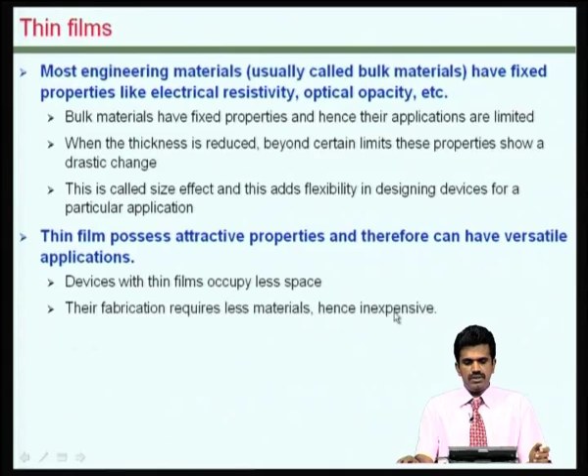Obviously, since these are thin films, the volume occupied by these, and hence the devices made of these, is much smaller. So they occupy less space, and the overall requirements in various contexts in terms of materials, in terms of energy required, etc., would be far less when materials are handled as thin films.

Going back to what was discussed in the previous lecture, various types of thin films are used in the fabrication of MEMS and microsystems. These include semiconductors, various metals, several special materials, and also several dielectric materials, including derivatives of silicon. We also see here polysilicon, and I will discuss what this is a little later in this lecture.

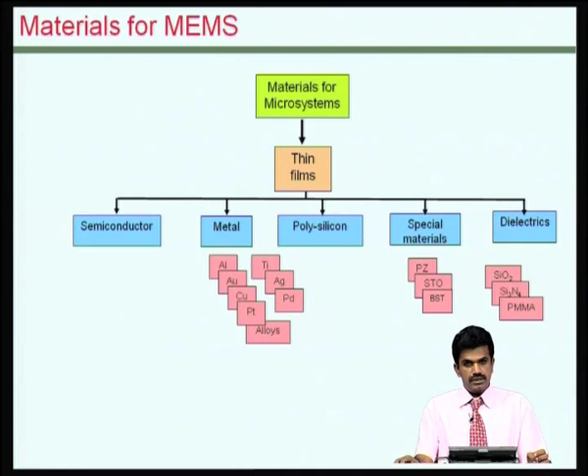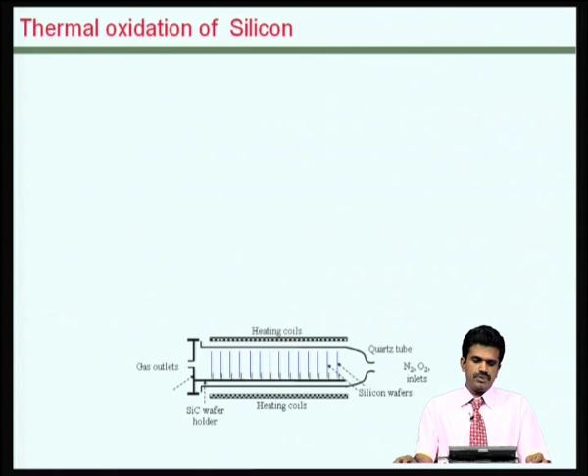One of the easiest films that can be made on a silicon wafer is the oxide of silicon, and it can be fabricated in a simple furnace like this by processes known as oxidation, and whether there is steam present or not, we call it wet or dry oxidation method. The chamber that you see here is a dry oxidation furnace,

in which you have these gas outlets, and there is a series of wafers assembled, and all these could be oxidized simultaneously using these heating coils outside the quartz tube where these are arranged, and you have this gas flow here.

The wet oxidation process is relatively faster, but the films grown by this are typically less dense and porous, and hence where the requirement is for porous films, one usually goes for wet oxidation and vice versa.

Dry oxidation is a little slower, and typically denser films can be formed.

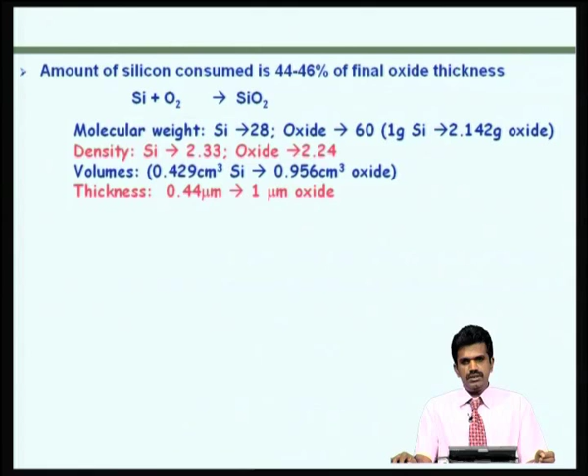We basically start with the molecular weights of these materials, the ingredients, and so essentially we can say that 28 grams of silicon would result in 60 grams of oxide, and knowing that the densities of silicon and oxide are 2.33 and about 2.24 - again this could vary, the oxide density could vary based on the approach by which it is fabricated - based on these we could calculate the volume of silicon consumed relative to the volume of the oxide that is formed. Working through this, we can see that about 0.44 micrometer thickness of silicon would result in a micron thick layer of oxide. So this is one good way of calculating the oxidation procedure, the thicknesses of the material that is formed.

In fact, the rate of oxidation by either of these processes depends on various factors. It depends on the crystal structure of the silicon, that is whether it is a 100 wafer or a 111 wafer. In a previous lecture, we have seen that the chemical characteristics of the silicon wafer depend on the crystallinity, and silicon is primarily an anisotropic material. The oxidation rate also depends on the doping and presence of various impurities in the oxidizing gas, and also the other parameters that one can use in the process.

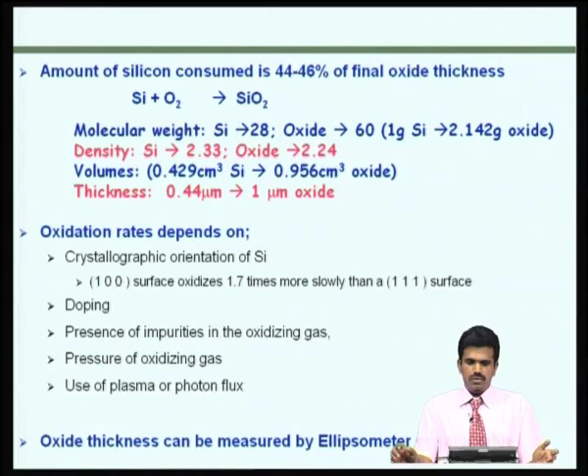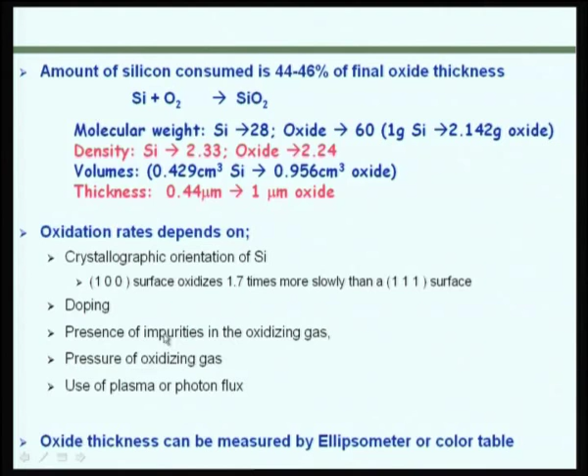Typically, the oxide thickness is measured by an instrument called an ellipsometer, and we work with a standard table of colors based on how the wafer would look. You make use of that and then determine the thickness.

But oxidation is only possible in the case of silicon, and only to form silicon dioxide.

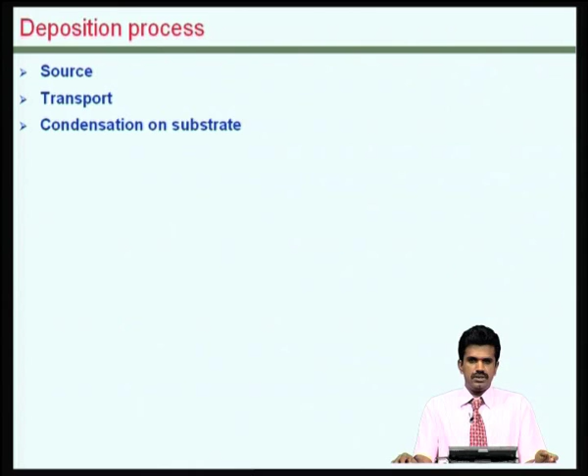In general, to work with thin films, we need to start with the source material of the thin film, transport this source material, and condense it onto the substrate. So a series of process steps would be required in a general scenario when one would want to deposit a thin film onto a wafer, whether it is silicon or other materials. And obviously, the nature of the film deposited would depend on various process parameters, including what the substrate is, the temperature, pressure, whatever gases that you are using, and various other factors similar to that.

So in the deposition process, what we are trying to do is create the most favorable process conditions, so that material is transferred from the source to the substrate surface in the most efficient manner, and so that we get the best quality films, possibly with the maximum thickness possible within the minimum time, so that we get some kind of engineering improvement. There are basically two approaches.

One is called physical vapor deposition, which is essentially the physical transfer of material from the source, normally known as the target, to the substrate. Whereas in the case of the chemical process, it's essentially based on some kind of a chemical reaction to deposit the material onto the destination, which is essentially the substrate.

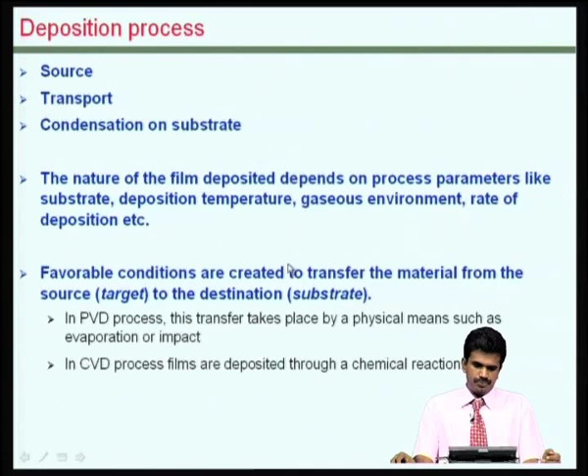Major deposition schemes therefore are based on either physical vapor deposition or chemical vapor deposition. Some examples of physical vapor deposition include the evaporation technique and what is called the sputtering technique. There are several variants of these, as you will see in subsequent discussion. There is also, as I mentioned, chemical vapor deposition technique, which is typically used for better quality films.

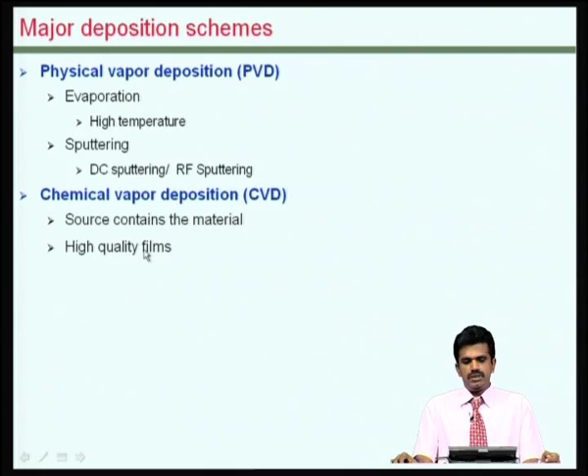And there are some other methods which are used for specialized purposes. For example, electroplating is used when one needs really thick films of materials relatively speaking, and spin casting or spin coating methods are used for polymeric materials, including photoresist, which are required for patterning. And there is also epitaxial growth of semiconductors like silicon over a surface, and things like that.

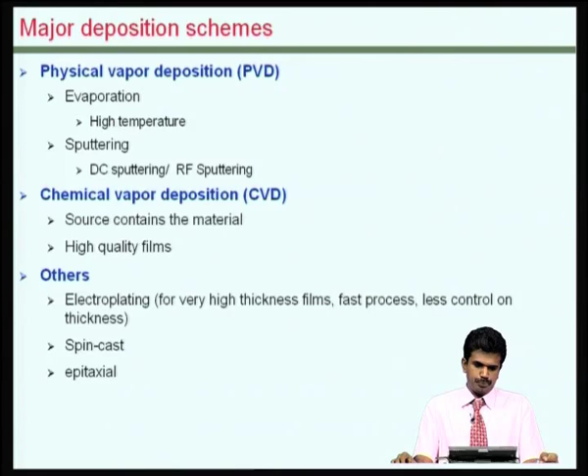Let us look at one of the common examples of evaporation that you would have seen in your own house. One of the common examples is basically you would have seen water boiling in a vessel in the kitchen, and if you put a cold lid over the boiling water, you can see that the water condenses on that lid surface.

Evaporation is essentially the same thing done for engineering materials such as metals, which could be melted at relatively low temperatures. Hence, evaporation technique is usually used for metallic materials, but obviously metals cannot be melted at let us say 100 degrees centigrade or anything near that.

So one needs to essentially reduce the pressure within the chamber, so that the melting temperature required for the metal is relatively, once again, under control, so that it is not too high, and we need to have some kind of an arrangement to create that kind of a temperature.

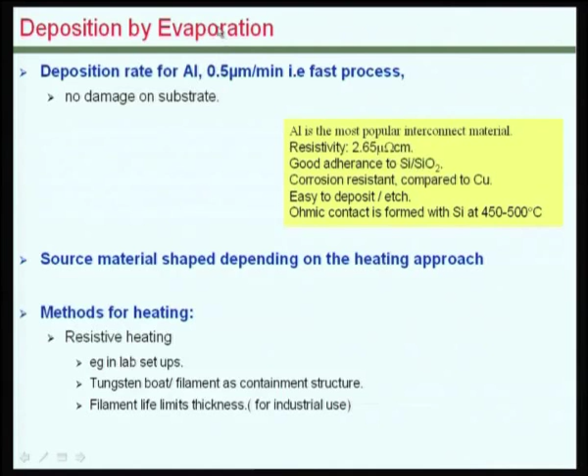Essentially the evaporation rate will therefore be a function of the vapor pressure of the metal that is being deposited. One of the common examples is aluminum, which has a relatively high rate of deposition when deposited by evaporation. A relatively good quality of film can be obtained at a good thickness by the evaporation process, and it sticks very well with the silicon substrate. Hence you will see that aluminum is used in ICs quite often, and one of the reasons is that it can be deposited relatively easily.

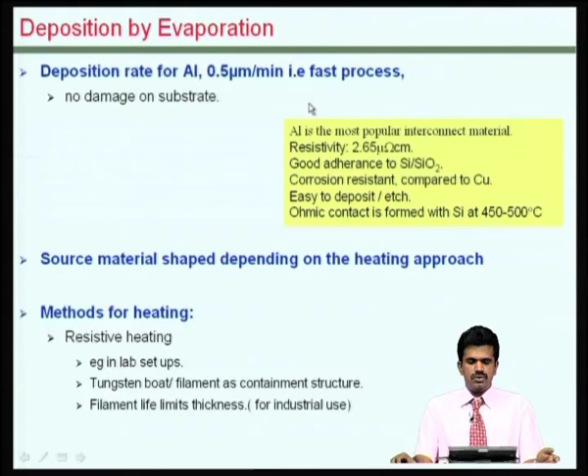The source material will be shaped, whether in terms of filaments, springs, or small pellets. It all depends on the heating arrangement. One of the simplest ways of heating, especially for aluminum, is resistive heating, typically used in a lab setup where a tungsten boat is heated, and pieces of aluminum are kept over it, which melt and evaporate, getting transferred onto the substrate surface.

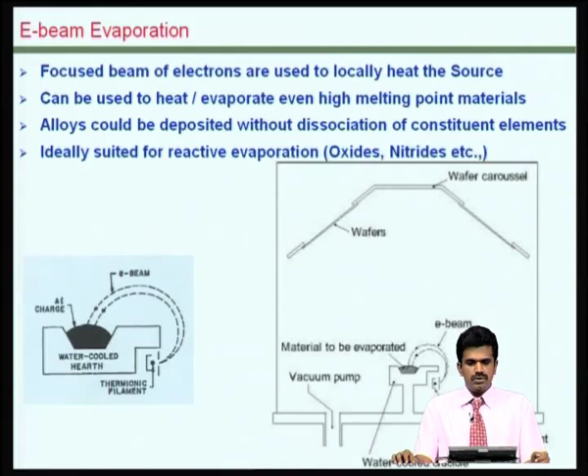But most materials have much higher melting temperatures and cannot always be melted just by heating them. So we use other ways of energizing their atoms or molecules from the source so they can be displaced and transported onto the substrate surface. Here is an arrangement in which an electron beam is used for evaporating the source materials inside a crucible, and these could be directed towards the wafer in a carousel.

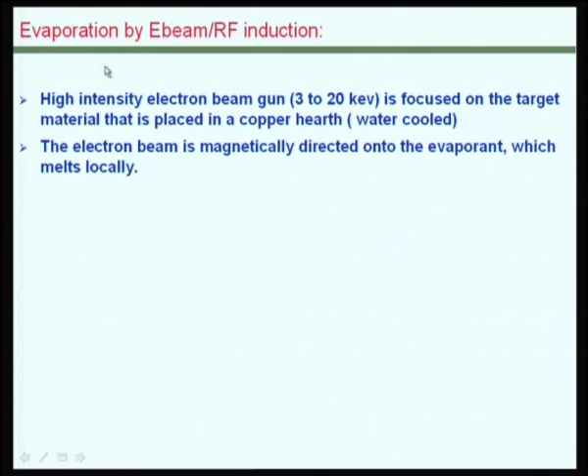It is also possible by RF induction to generate such beams, which could essentially displace atoms from the source material inside the crucible. These approaches result in relatively better quality films compared to simple heating based approaches, and have reasonably good deposition rates. But because these include energy transfer from one beam to another, there could potentially be damages happening in the devices on the substrate, so one has to choose the approaches required in a particular context. Obviously, the system required for such deposition could be more expensive than the previous one.

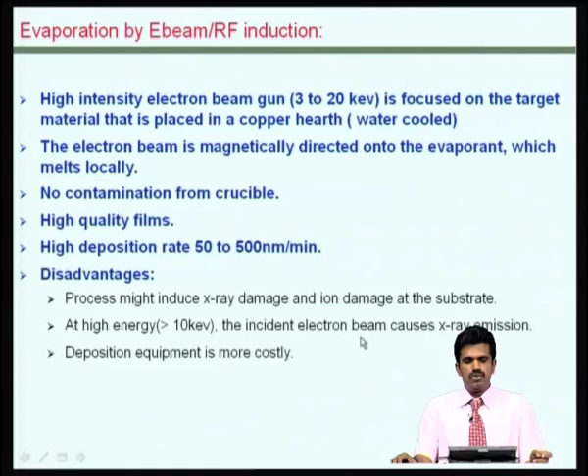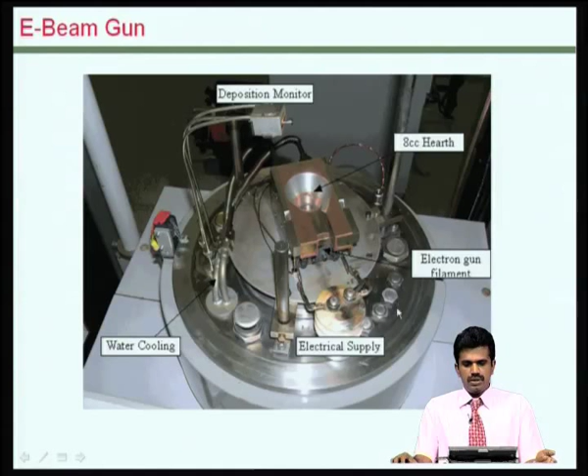Here is an image of an opened out chamber in which this electron beam gun can be seen very clearly.

In the second physical method listed, there is sputtering. This is once again a physical phenomenon of transporting material, done by creating a plasma, and the positive ions created by this plasma are attracted towards the cathode. The source material is kept at the cathode, and when these ions bombard the target, atoms are sputtered out. We keep the wafer at the anode, so that the displaced, sputtered atoms coming from the target material attach onto the wafer. So the film essentially grows on the wafer.

Once again, to create this plasma, one requires a low pressure, and hence this is done in a vacuum enclosure. So the source material is at the target, and the substrate for sputter deposition is kept at the anode.

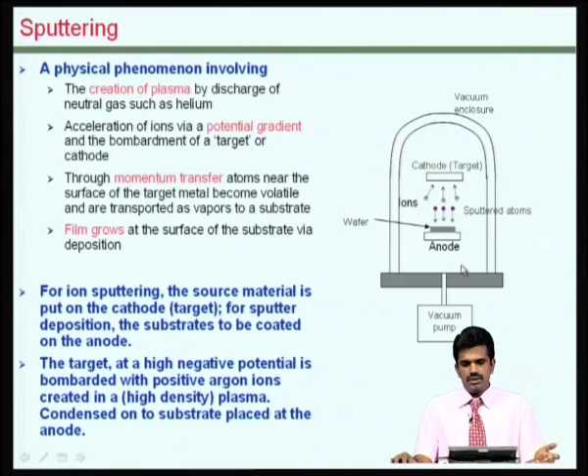The target, as I mentioned, is at a high negative potential, and the ions in the plasma - argon is typically used as it is an inert gas - are used for the displacement, and the displaced atoms are condensed onto the wafer.

There is a terminology called sputtering yield, which is essentially the average number of atoms ejected from the target, kept at the cathode. This depends on the incidence angle of the ions, the energy of the ion, the mass of the ion and the target atom, and the surface binding energy of atoms in the target.

Hence it would vary depending on the target material. As you can see from the list, with a standard plasma creation environment, the average number of atoms displaced would vary, for example, from 0.51 in the case of titanium to 2.4 in the case of gold in this list.

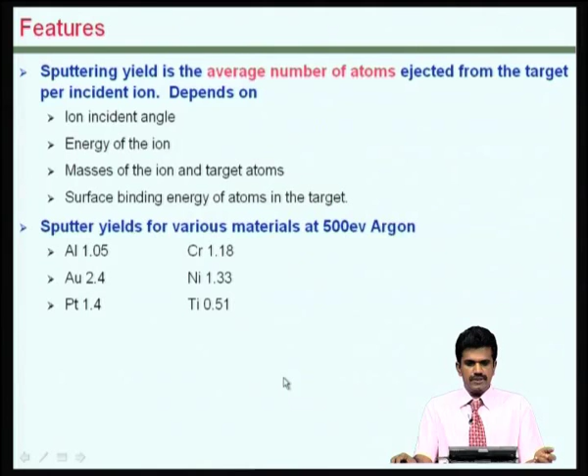The basic features of sputtering include a wide choice of materials, because in the case of evaporation, we could only use materials with relatively low melting points. Since sputtering is usually done at a lower rate, films have better adhesion characteristics, and there are ways to engineer sputtering to achieve complex stoichiometric films.

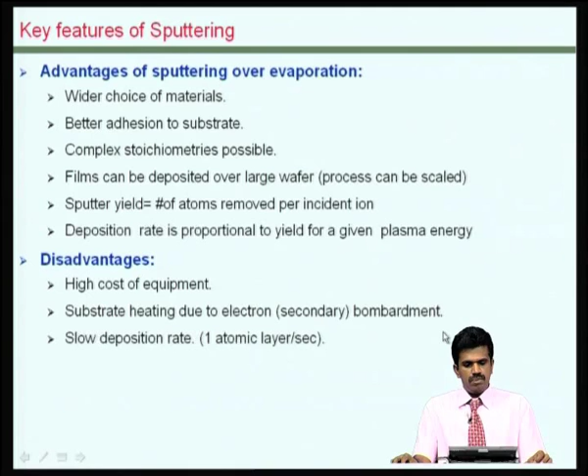Films can be deposited over a larger area by sputtering, and hence compared to evaporation, sputtering is more popular and widely used when one wants to cover larger wafers, especially in industrial facilities. The deposition yield is proportional to various factors we have seen previously. Disadvantages include the high cost of equipment, and sometimes substrate heating happens due to secondary bombardment. Also, as mentioned, the deposition rate is relatively slow.

There are essentially two types of sputtering depending on how one creates the plasma. One can create a plasma with DC for conducting materials such as metals. We create an RF magnetron based plasma for dielectrics or insulating materials, which has better control, especially for depositing these dielectric materials.

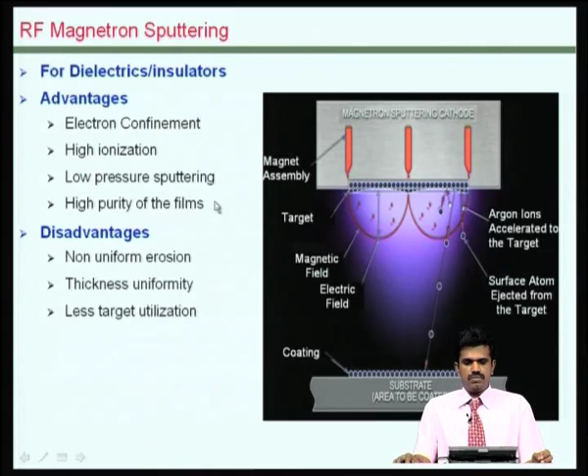And once again, this is also very popular for large area films, especially for industrial applications. There are challenges in creating uniform films, and in proper utilization of the source, which is essentially the target material for the films.

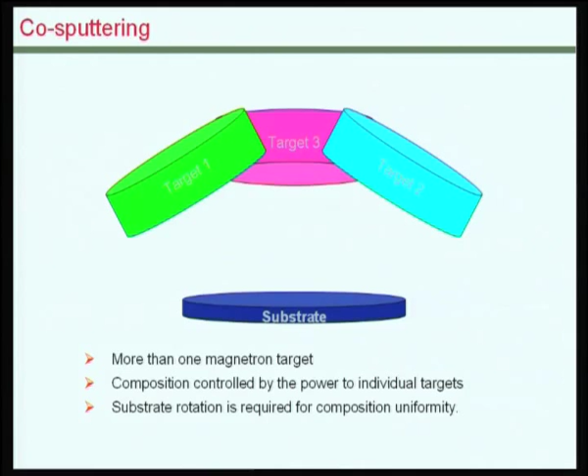In this approach, it is also possible to do co-sputtering with multiple targets. So when we need a composite film, it is also possible to locate these targets appropriately, so that we can have a co-sputtered film based on the various materials provided with individual targets. That is one key advantage of using sputtering.

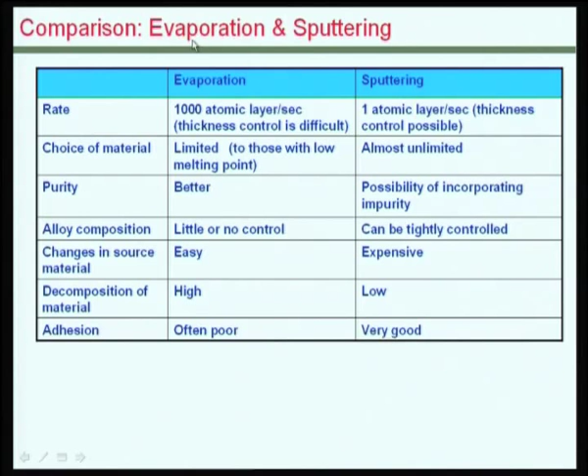If you look at a basic comparison between evaporation and sputtering techniques, what stands out includes the low rate of deposition of sputtering and the unlimited choice of materials available in sputtering. Relatively, evaporation gives better purity films and can be used for alloy kind of materials, but obviously it is more expensive and results in films that are typically of better quality than evaporation.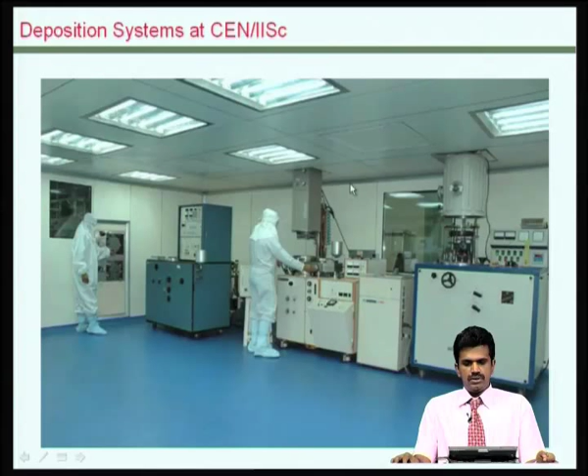What you see here is a set of deposition equipment available at IISc, where you can use sputtering or evaporation kind of techniques for depositing various films.

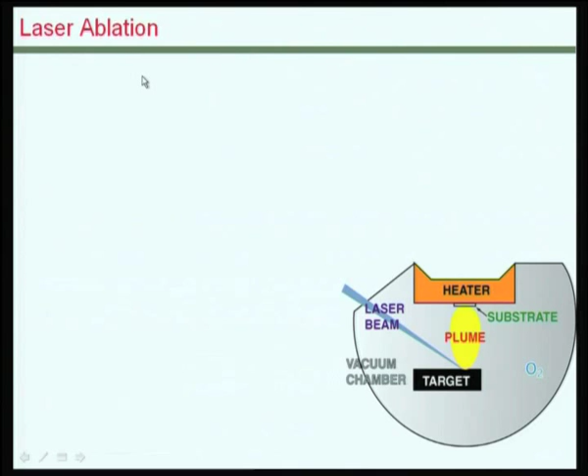Another approach for depositing even better quality films is based on laser. In this case, as in sputtering, instead of using an ion beam, we use a laser beam. Lasers can be used to melt materials because of their high energy, and this melted material can be arranged to be transported onto the substrate. One of the methods is essentially based on pulsed lasers, typically called pulse laser deposition or pulse laser ablation techniques.

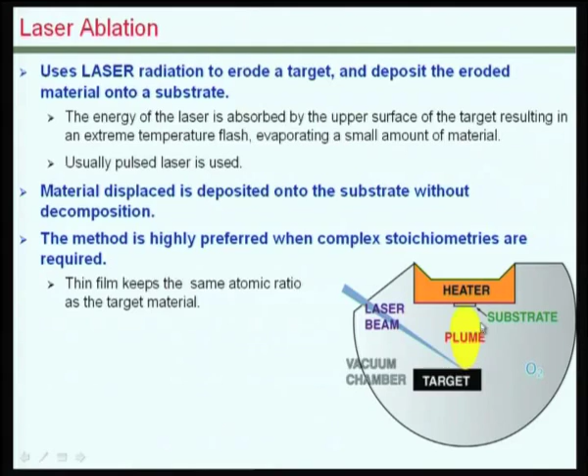The material is deposited onto the substrate without decomposition, so it does not basically change its properties in this method. This is also useful when complex stoichiometric properties are required for the films, and if we have a target material with the same stoichiometry, this can be transported from the target to the substrate by laser ablation techniques.

As I mentioned, one of the common methods is called PLD, and this can be used for high quality thin films of materials such as superconducting materials. The main advantage is that it is relatively easy to reproduce films based on this, and the films deposited by these techniques do not require post deposition annealing, which is typically required in the previous physical vapor deposition techniques you have seen here. Obviously, the laser characteristics and some other environment parameters determine the deposition rate by this approach.

The next deposition approach we want to discuss is based on chemical vapor deposition. In this case a chemical reaction happens which transforms the incoming gaseous molecules, typically called precursors, and the precipitate of the chemical reaction is made to stick onto the surface.

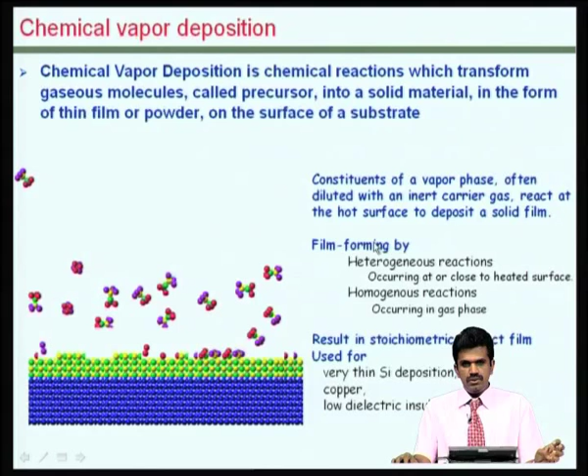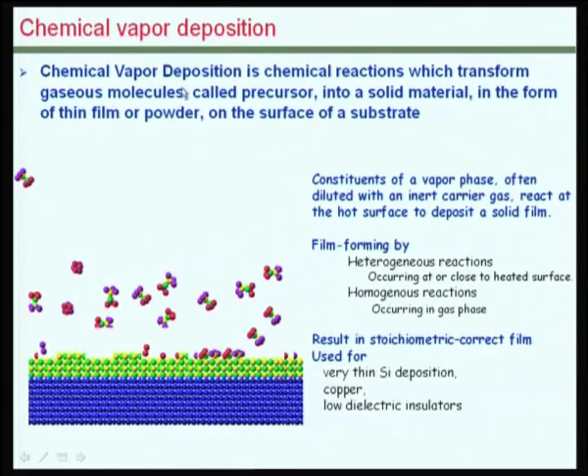In this case there is no real target, the incoming material is essentially in gaseous form, and we need suitable appropriate reactions to happen so that films formed by either a heterogeneous or a homogeneous chemical reaction form onto the surface, with various materials formed onto the substrate at a wide range of environmental conditions by the chemical deposition schemes.

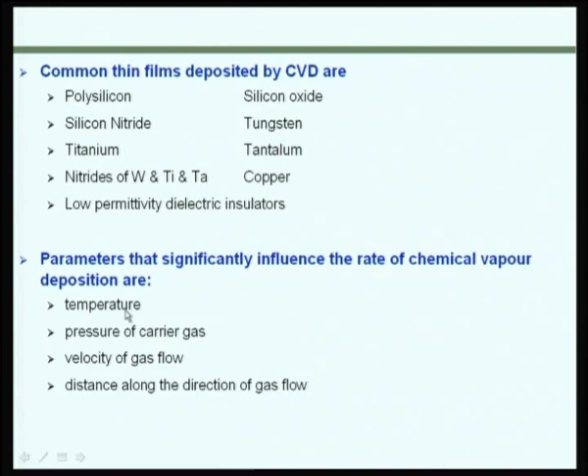Films include silicon compounds, metals, and various other dielectric insulators. The process parameters include the temperature, the pressure, the flow of the gas, the distance within the chamber, and the direction in which these are incident onto the surface.

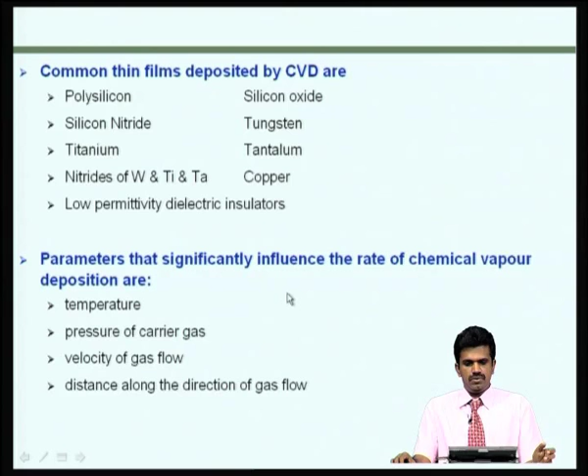It is essentially the mass transport of the reactants that results in the formation of these precipitates, usually formed by gaseous phase reactions from the precursors. There is mass transport from these precursors onto the growth surface, and some kind of adsorption happening there, so that the films stick to the surface. There are surface reactions and surface migration, so the film forms continuously onto the surface, and the byproducts are desorbed out of the surface so a good quality film can be formed.

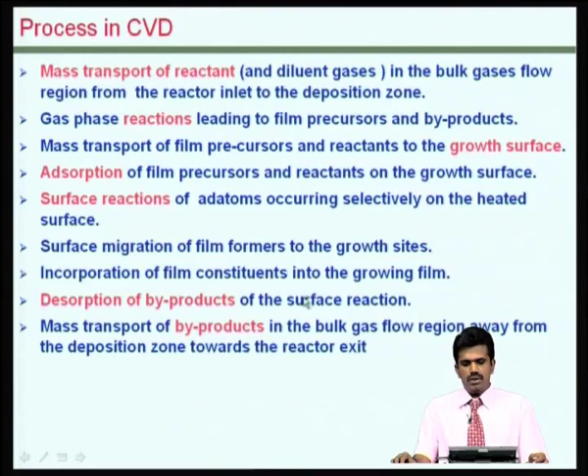These byproducts are taken out from the chamber. One typical situation in which films are formed on multiple wafers simultaneously is shown here.

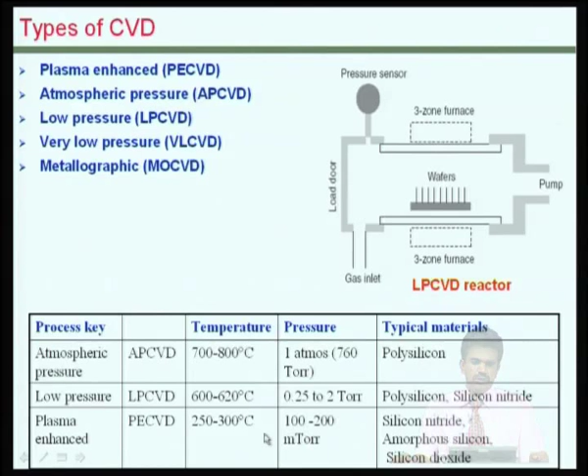We have to control the pressure inside the chamber, temperature, and various parameters. There are various types of CVD based on how we enable these chemical reactions to happen. There are techniques in which we use plasma inside the chamber, usually at lower temperatures.

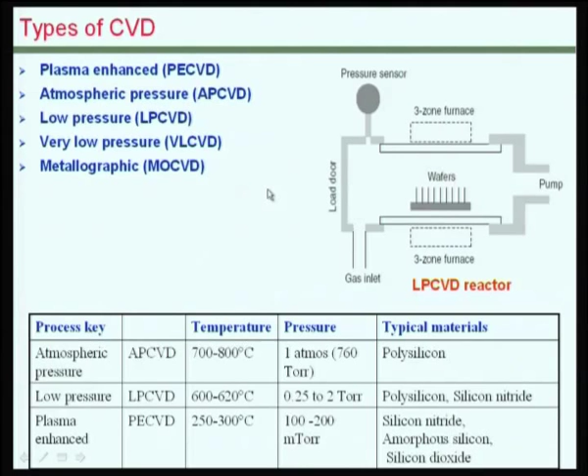There are also methods in which lower pressures are used, and specialized methods using metal organic materials for depositing metallic films. If you see typical ranges of temperatures, the order would include PECVD, plasma enhanced chemical vapor deposition, which is usually done at much lower temperatures than other methods. Various materials could be deposited using these approaches, typically used when relatively better quality and thinner films are required for various applications of microsystems and integrated circuits.

CVD is based on chemical reactions. For example, to form silicon dioxide, one would start with silane and oxygen, and make the chemical reaction happen at an LPCVD reactor at about 500 degrees centigrade for the formation of silicon dioxide. There are also other source materials that could be used for realizing silicon dioxide.

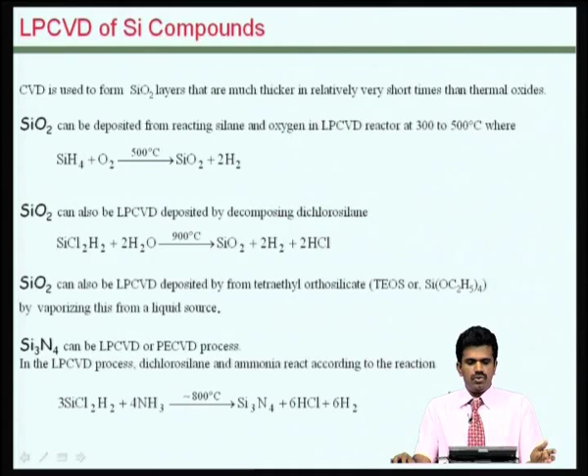Similarly, silicon nitride can be formed either by LPCVD or PECVD, based on various other factors, and typically the temperature is 800 degrees centigrade for LPCVD of silicon nitride.

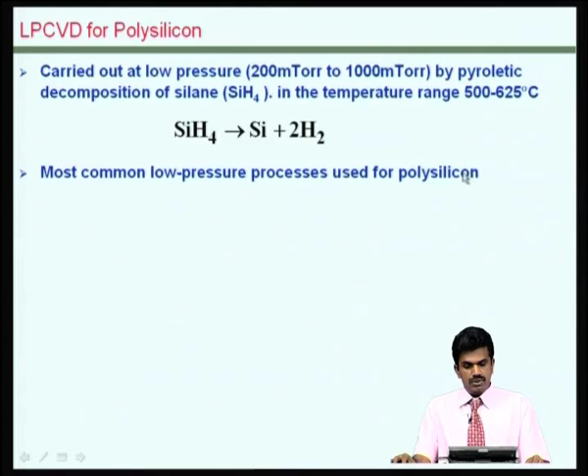It is also possible to deposit silicon layers onto a wafer by using LPCVD. Usually LPCVD is used in this context, at a pressure ranging from 0.2 to 1 torr, and the deposition rate is typically 10 nanometers per minute at about 600 degrees centigrade. But if the temperature is lower, what is formed is usually amorphous silicon.

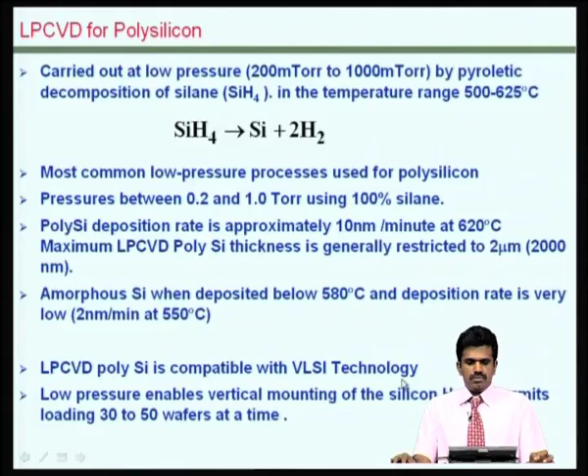Now, the question is, what is really this polysilicon, and why is it typically used in IC fabrication and in many VLSI kind of devices. Polysilicon is essentially what is called polycrystalline silicon, so it is not a single crystal silicon formed by this approach.

If you recall, when we talked about the substrate silicon wafer, it is essentially a single crystal silicon, so from one point to another anywhere on this wafer, the silicon atoms are at a fixed distance, which is a multiple of the lattice constant of the wafer. But in the case of polysilicon, locally it consists of small crystallites, with grain boundaries beyond which the lattice is not continuous, hence it is not a single crystal silicon. But it is a very good structural material for MEMS.

Most of the properties of polysilicon, especially in the context of MEMS, are very similar to that of silicon, and it can be doped to various levels of conductivity, and hence it can be used as an electrode material as well, giving it multiple roles in many microsystems.

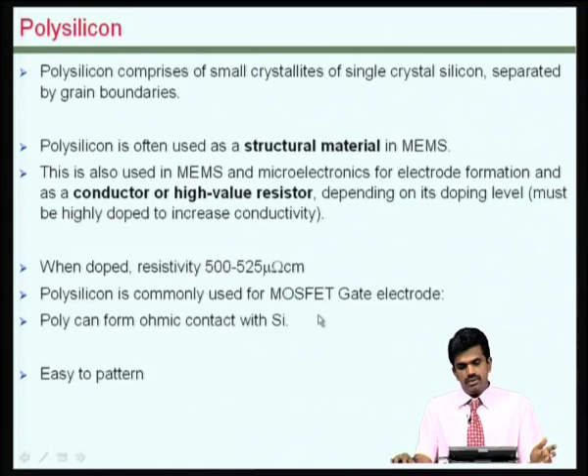It is possible to deposit metallic films also by CVD techniques, typically called MO-CVD, metal organic chemical vapor deposition schemes. So, the precursor material is typically a metal organic compound of the particular metal to be deposited.

This results in extremely high quality films, but at a very low rate of deposition. Hence, it is used for specialized components, for example, for optoelectronic devices, such as gallium arsenide or gallium nitride based devices and things like that.

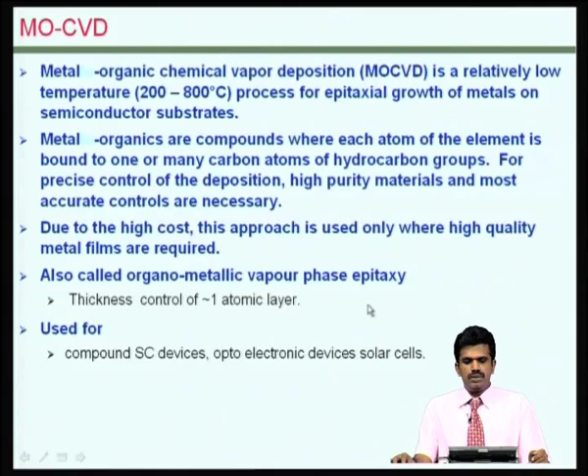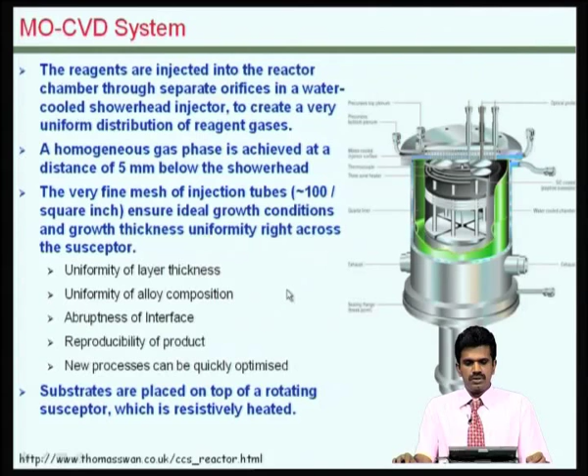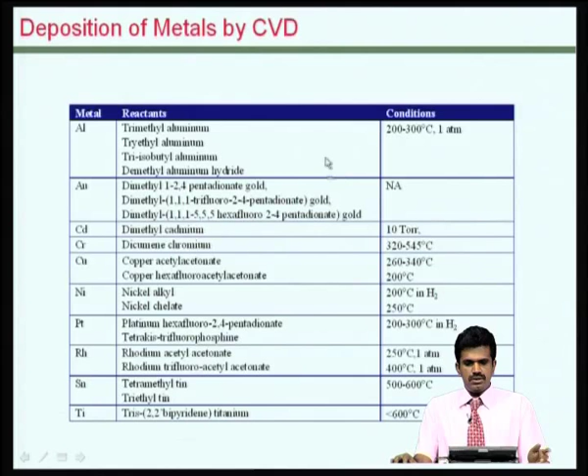In a typical MO-CVD system, various reagents are injected into the chamber, and just like in any other CVD scheme, we make the chemical reaction happen, and we also do some rotations so that uniformity and good control of the film deposition can be obtained. Many metallic films can be formed based on their organic precursors used in these CVD systems.

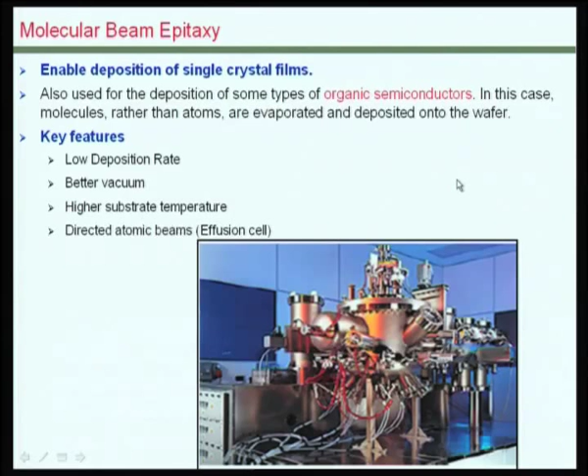One more approach, although not very much used in the context of microsystems per se, is molecular beam epitaxy, which gives even higher control of film characteristics. It is also a very low deposition scheme, and as you can see, a highly complex system is required for this purpose as well.

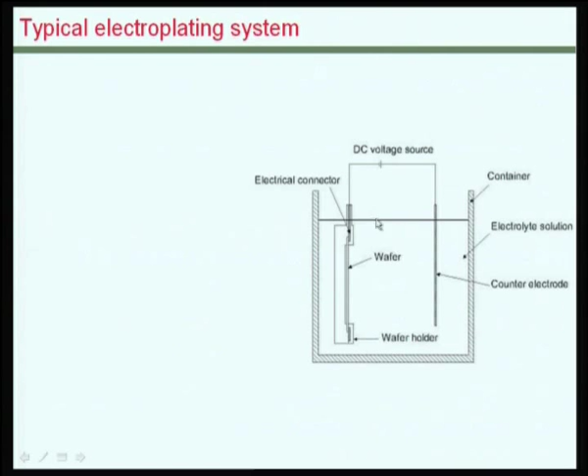Changing gears, one of the simplest and most widely known approaches is based on electroplating, which I am sure you would have heard about in various other contexts. What you require is an electrolyte bath in which you apply a potential between the cathode and anode, and deposition can be resulted onto the wafer by a process known as electrolysis.

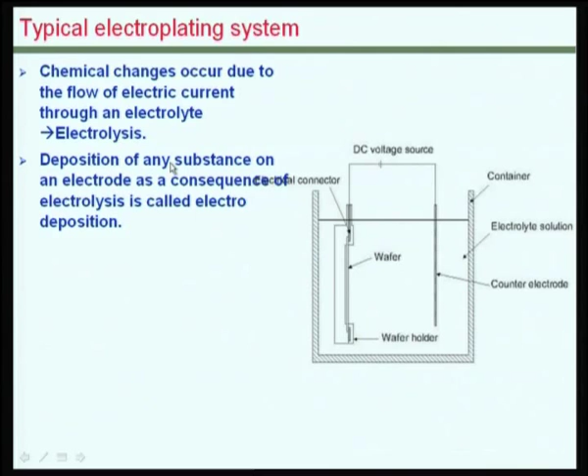It could be used for a wide range of materials, and the process is governed by Faraday's laws, which essentially convey that the magnitude of the chemical change is proportional to the current that is passed through, and the masses of the different species deposited is based on the electricity provided into this scheme.

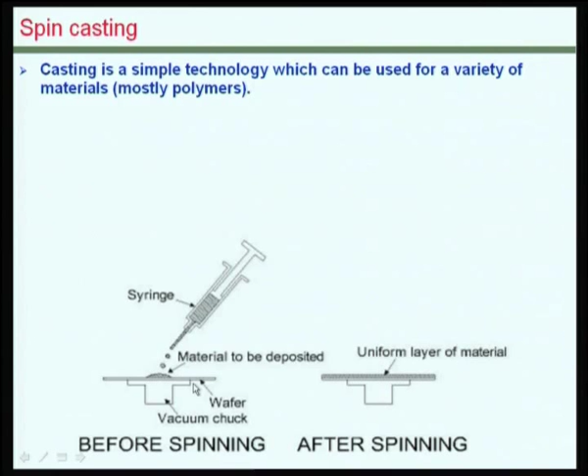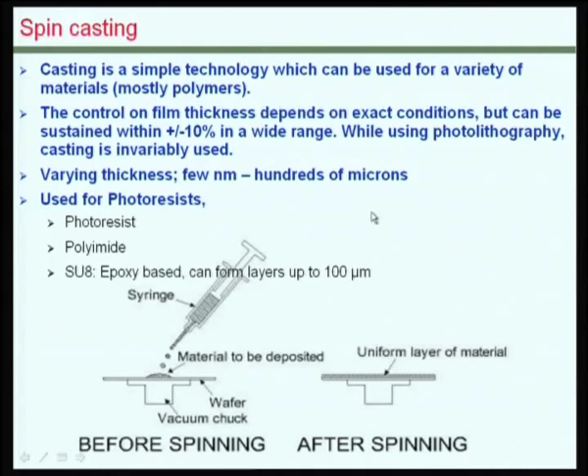When spinning, the droplets would be spread into a thin film based on the centrifugal force, and the surface tension and rate of RPM are controlled to obtain various thickness films. Reasonably good uniformity of thickness can be obtained at a quick rate by this approach, with minor variations in thickness though. It is typically used for polymeric materials such as photoresist, polyimide, and even SU8, which is incidentally becoming a very common material for microsystems applications.

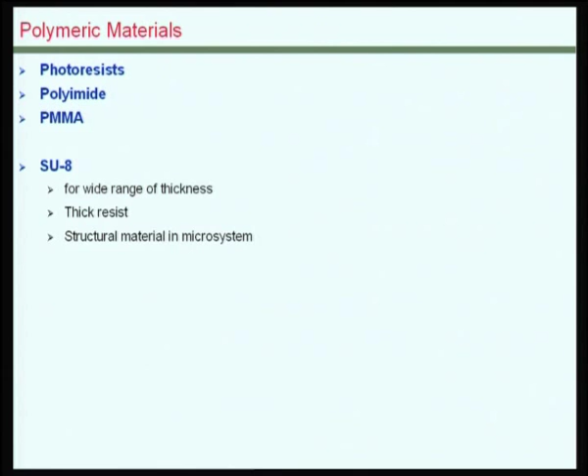Let us look at some of the polymeric materials that are typically used. Photoresist is a resist material, and as you will see soon in another lecture, this is required for pattern transfer in most instances. Polyimide and PMMA, polymethyl methacrylate, are very common plastic, polymeric materials used in various microsystems applications. SU8 is fast becoming another popular polymeric material which can have a wide range of thicknesses.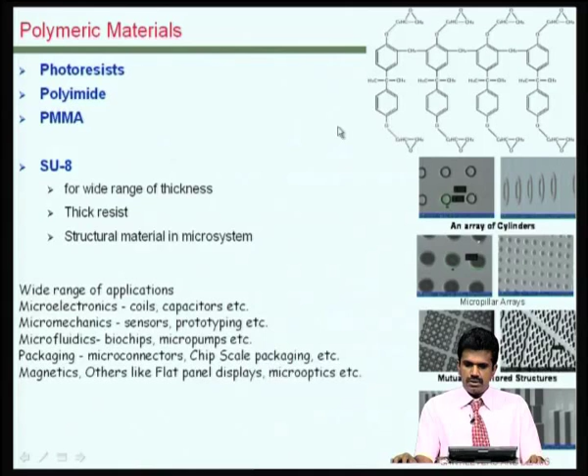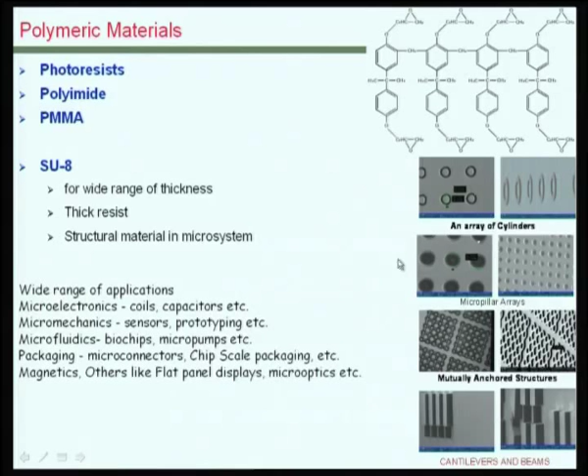So, when you need a thick resist material for some reason, one can use SU-8, and it can also be used as a structural material. It is a polymeric material, and the bonding between these different polymeric chains is so strong that it has a wide range of applications in microelectronics, mechanics, fluidics, and even to some extent some kind of packaging can be done using this method. In the facility here, we have done a wide range of structures for microsystems using SU-8 materials, as you could see from the images here.

Let us look at how one can determine the quality of the film, because that is essential in repeating and reproducing materials and devices.

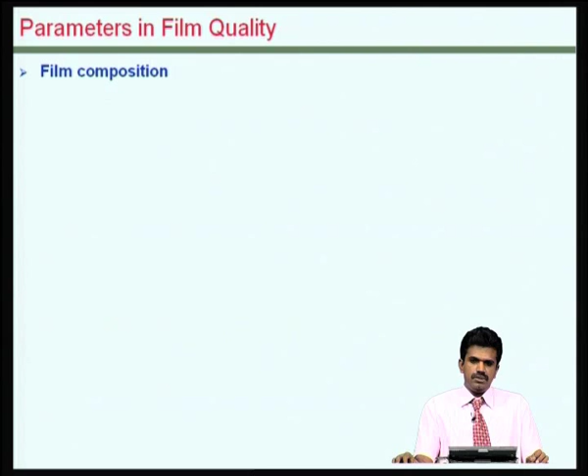Composition of the film is obviously important, because that determines all its other characteristics to begin with. The grain size is also important, because as you have seen in the case of polysilicon, that decides the overall characteristics, including the electrical characteristics of the film material. Thickness can be controlled, but yet the thickness that can be formed, as well as the uniformity of the thickness that can be realized, is obviously important in realizing good quality devices.

In the context of deposition of films, another important parameter is the step coverage. This happens when you are depositing a film onto a geometry that is already formed, for example, a wafer in which some kind of structure has a pre-existing step variation. When we transport materials from a source onto this surface, typically a line-of-sight rule is valid, and hence the vertical edges of the structure may not get coated in most approaches. So, there are approaches such as rotating the wafer holder, or using non-line-of-sight approaches for depositing films when continuous coverage over stepped geometries is required.

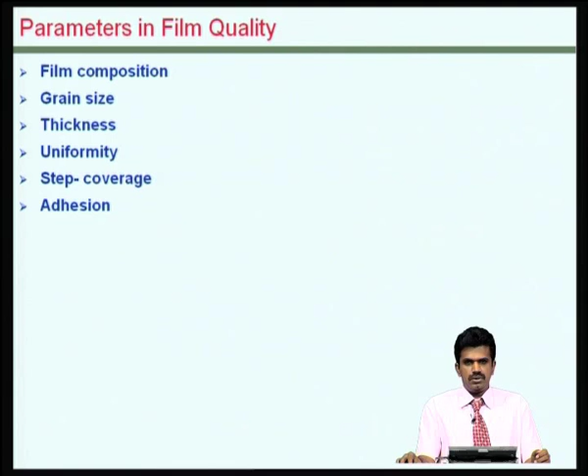Adhesion is obviously critical in retaining structures attached onto the surface of the wafer. It is also important that the materials we choose are corrosion resistant, so that the performance is retained over a period of time.

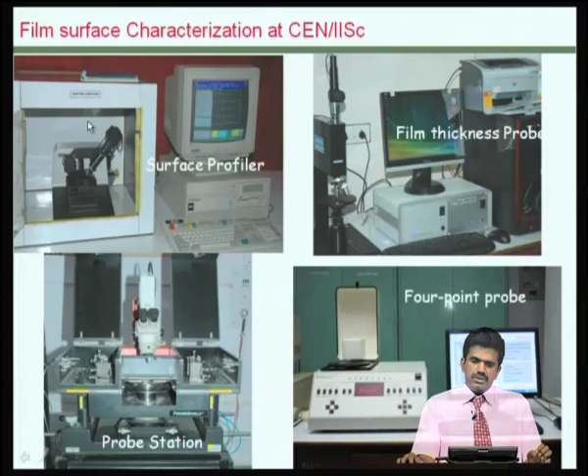The film characteristics that I have mentioned are evaluated using various instruments shown here. The thickness as well as the uniformity of the thickness can be evaluated using a surface profiler. What you see here is a contact type surface profiler, where there is a stylus which would actually move and its position is recorded, and based on the position of the tip of the stylus, one can determine the height of the surface of the film.

There are semi-optical methods in which the film thickness can be measured. There are electrical techniques in which the film conductivity and other characteristics can be evaluated. There are methods based on probe stations for measuring various other electrical characteristics. For example, the junction effect, the capacitance, and quantities like that could be measured by accurately positioning probes onto the devices formed on the wafers.

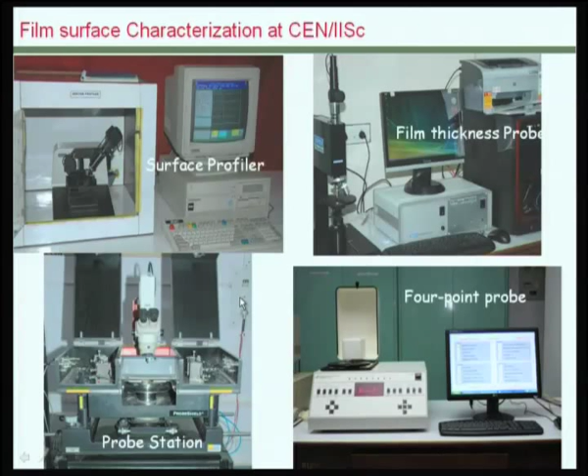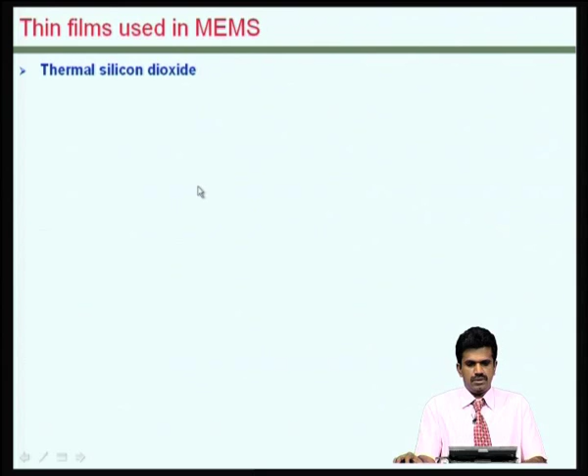Let us also look at the typical thin films that are used in the context of microsystems. As we have seen in the beginning, thermal oxide of silicon is an important component in this context. There are various dielectric materials other than silicon compounds that could be used in microsystems, including polymeric materials. Some of those I have already discussed.

There are also several ceramic materials, and as you have seen, these could be deposited using techniques such as RF sputtering, because these are typically non-conducting materials, and also PLD kind of techniques. And we have seen various chemical vapor deposition schemes for the deposition of silicon compounds.

And as I mentioned, polycrystalline silicon is another important material in the context of microsystems. We also would require metallic films. Although polysilicon is conducting, in many cases that conductivity is probably not sufficient, and we would need to look at metallic films, and various materials including aluminum are used in this context.

In the context of smart microsystems, we also come across various smart materials, typically also called active materials. These include ferroelectrics and piezoelectrics. These have very interesting characteristics and could be used in several sensors and actuators. Once again, these are essentially ceramic materials, and the same methods we discussed, which are sputtering or laser based techniques, could be used for their deposition as well.

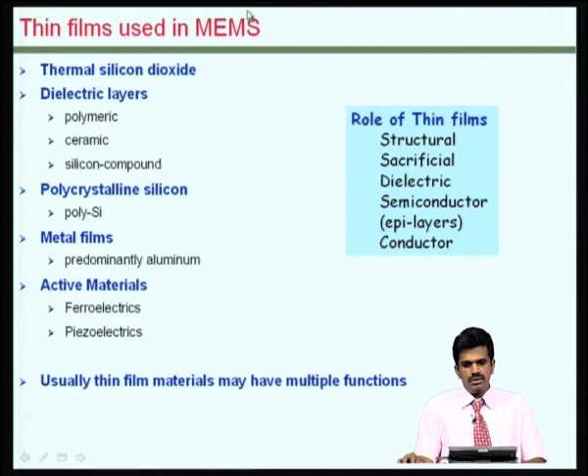As you have seen previously, these thin films can have multiple functions. For example, a very common example is the case of polysilicon, which could be used as a structural material and also used as the contact material. So the roles of these thin films are multifaceted, and for various purposes these materials are used in the context of MEMS and microsystems.

Now, we can also look at how these materials are chosen for various applications in microsystems. Especially in the context of microstructures, one would want to primarily look at the mechanical properties, the elasticity, the Young's modulus of the material, and as I mentioned, that depends on the material per se as well as how it is deposited. The chemical and electrochemical properties of various materials are relevant.

Biocompatibility issues have to be looked at. Whether these, if you are building let us say a lab on chip or bioreactors, this becomes very critical.

Electrical characteristics, especially for semiconducting materials, one needs to look at the mobility and the doping level, which would essentially result in the conductivity. Then thermal properties such as the heat conductivity and the expansion coefficient are very critical, especially when we have multiple layers of thin films having different materials; their expansion coefficients have to be looked at very carefully.

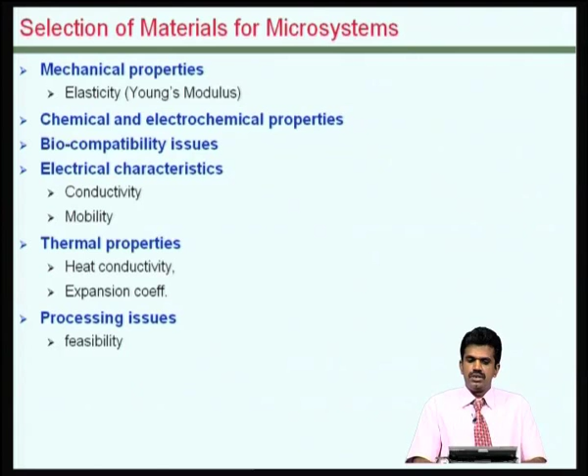So that there is no thermal stress between the various layers of films formed on the surface. Another critical issue when selecting materials is the feasibility of various processing capabilities that are available, and how we can deposit and pattern these materials, and whether the required infrastructure is available for using them.

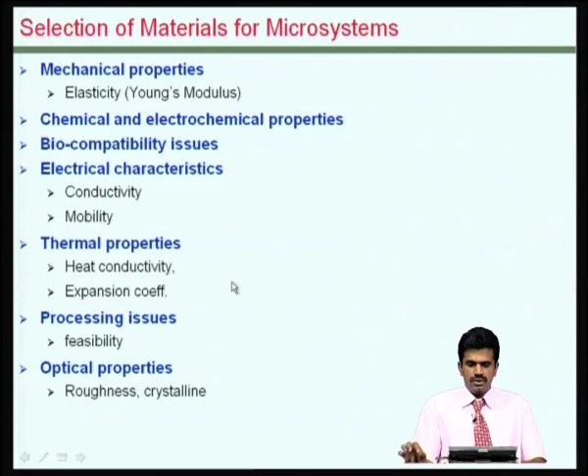The optical properties are also important, because that plays a major role in determining many of the other characteristics of the film.

Commonly used metals include aluminum, gold, along with some other layer below that. There are also platinum and palladium, which are used in several contexts.

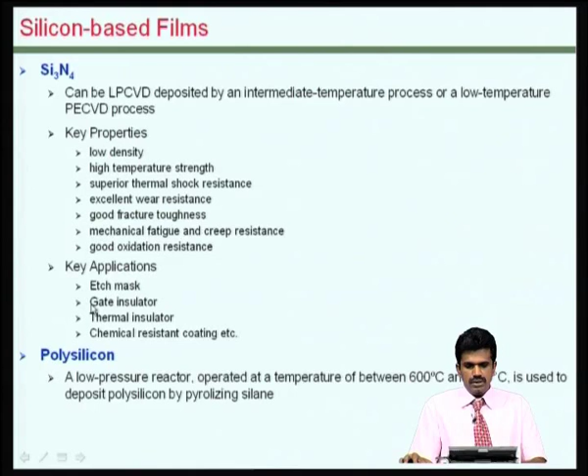There are several silicon based materials that I have talked to you about for various applications, including as an insulator and as a coating, but more importantly in many cases as an etch mask. I will come back and discuss the use of silicon nitride as an etch mask when we talk about etching of silicon wafers.

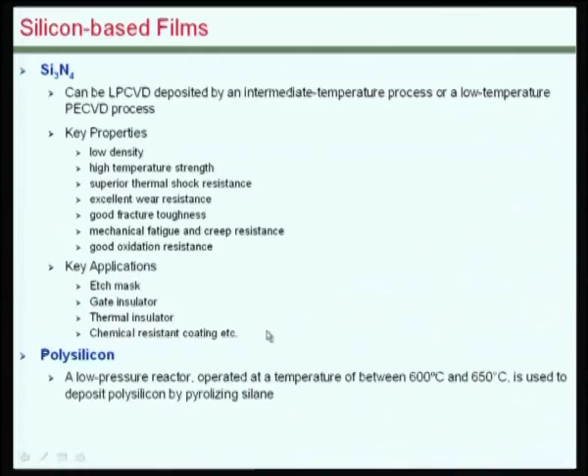Polysilicon, as I mentioned, is another important silicon based material. There are also several forms of silicon dioxide which are used in microsystems. Silicon dioxide can be used as a film, and it is also used as the substrate material in various contexts for microsystems. Silicon dioxide is also the constituent of glass, and various forms of glass are also used in microsystems.

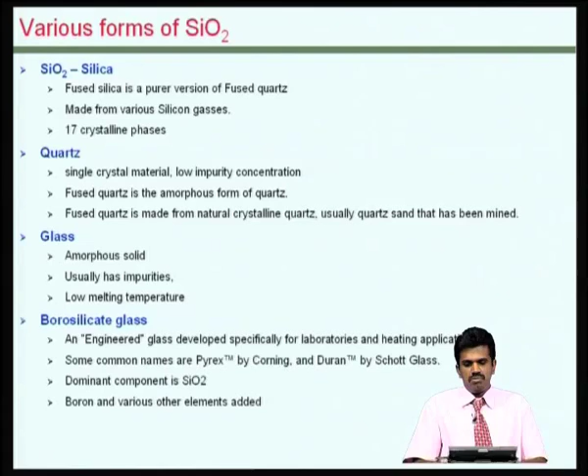So what we have seen in this lecture today is a set of schemes with which thin films could be deposited, and a list of thin film materials that could be used in microsystems. I hope this would be useful, and I would like to stop here, and we will discuss various patterning techniques in subsequent lectures. Thank you.